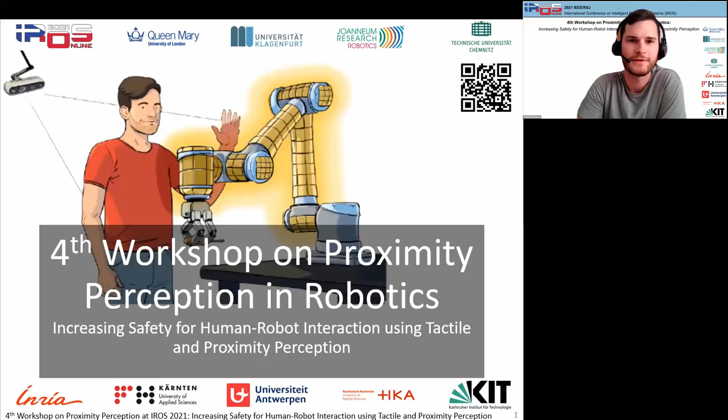Everyone, it's my pleasure to announce the 4th workshop on proximity perception in robotics. This year's topic is on increasing safety for human-robot interaction using tactile and proximity perception. I would give you a brief outline and general information about this year's workshop, how we organized it, and what is the plan of the workshop.

First, I would like to introduce our organization team. I will give you a short introduction to the workshop, and I will also briefly explain how we structure the workshop this year.

The topics of interest: the proximity perception workshop is now in its 4th edition, and our focus was always mainly on proximity sensing and also multimodal sensors, which is getting more and more attractive in this domain, like tactile sensors and shear sensors. We are also interested in robotic skins and the architectures involved in developing these robotic skins.

Our main focus and goal is to bridge the gap between proximity perception and tactile perception, as we believe these two fields are getting more and more important in the future, along with the applications involved. For example, human-robot interaction and human-robot collaboration with AI-based technology. We believe that bridging the gap between these sensing domains will further enhance future robotic systems.

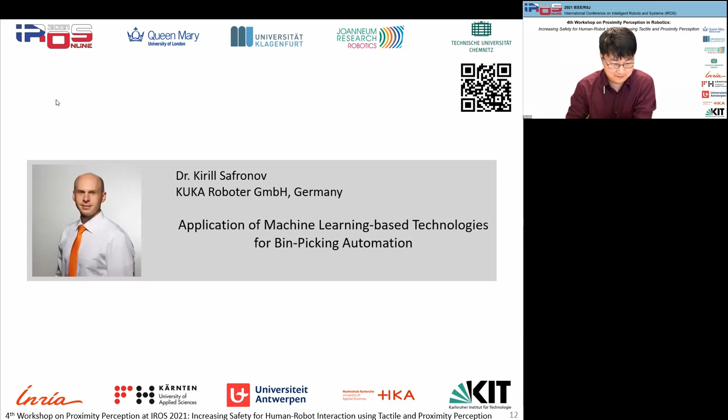So Kirill, can you share your screen? And your audio is turned on. Okay, can you see it? Yes. Yes, hear me? Yes.

Okay, hello and welcome to my talk. Today I would like to present the application of machine learning based technologies for bin picking automation at KUKA.

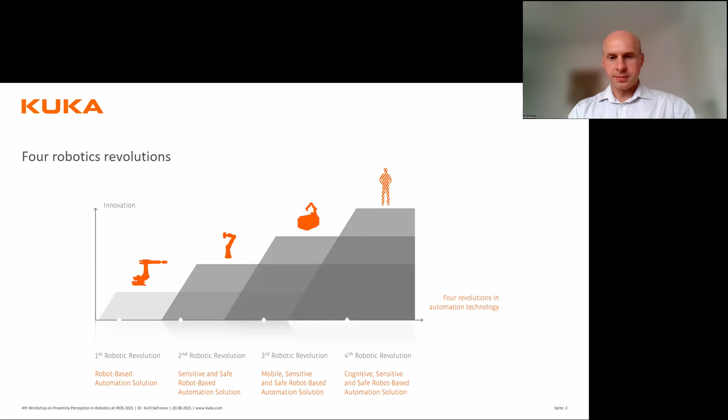Shortly about corporate research at KUKA: we are developing new technologies and innovations for what we call the fourth robotic revolution. We would like to make robots more cognitive, sensitive, and safe. You can see here the overview. At KUKA, we think of 4 robotics revolutions, and we are now at the 4th step.

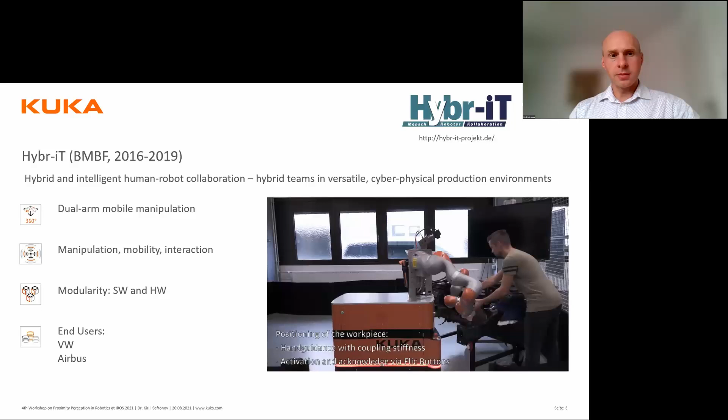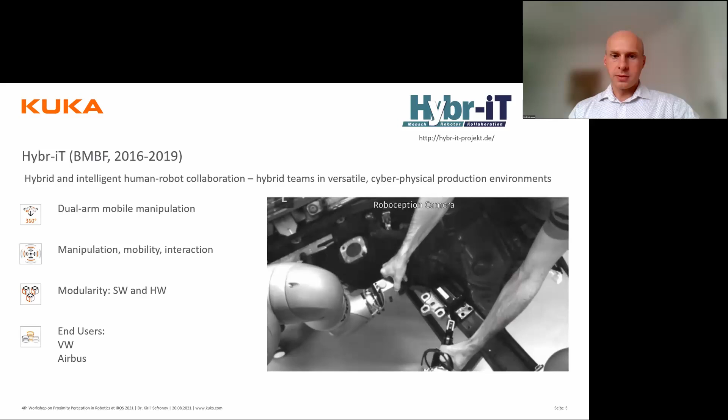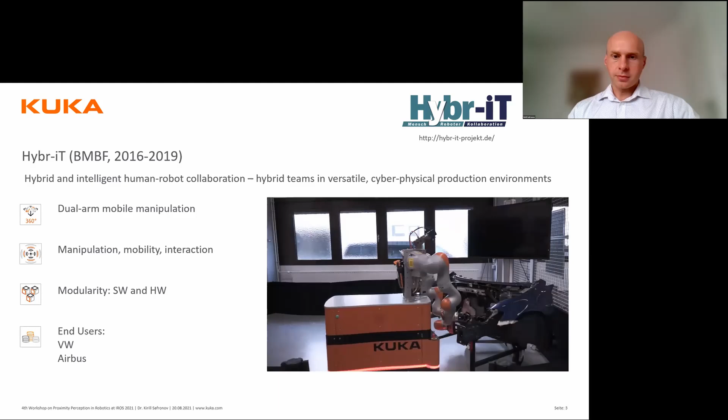For example, I can mention one project from previous years: Hybr-iT, which stands for hybrid and intelligent human-robot collaboration. We developed a dual-arm robot based on a mobile platform to help humans perform tasks which may not be so easy for a human, for example, to hold heavy parts in car production. The robot has a camera, can perceive the environment, can detect objects, can navigate through the environment. So it's our view on how production should look like in the future.

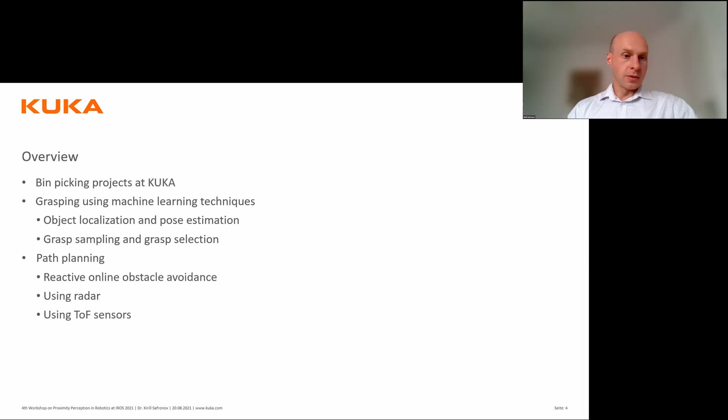But today I will talk about the bin picking projects at KUKA. Which projects do we have? Different techniques, for example grasping using machine learning, from object localization to sampling. Also path planning, how we can implement reactive online obstacle avoidance, also using radar and time-of-flight sensors.

Sorry Kirill, I think we have some audio issues. Can you maybe speak a little bit closer to the microphone? I think your noise suppression algorithm always kicks in and reduces your volume. Okay, now it's better? Yeah, now it's better, yes.

We use a 3 or 4 finger gripper, then the ItemPick project, when we are dealing with unknown objects we pick. It should not be so precise, so we use a suction gripper. And we have a lot of classic bin picking projects when we have the CAD model of the objects known, and we try to precisely grasp these objects using a 2-finger parallel gripper.

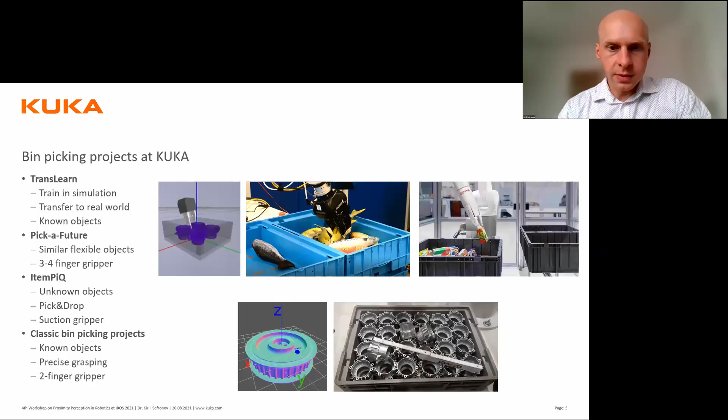So I would like to introduce the Pick-a-Future project, which sensors we used to detect these deformable similar objects. We have 2 systems: the mobile system, which consists of 2 cameras, the Ensenso stereo camera, then Asus Xtion camera, a 3D sensor using structured light; and a static camera system, which consists of different cameras like Zivid 3D or Photoneo, which are very precise. And we're using a robotic gripper.

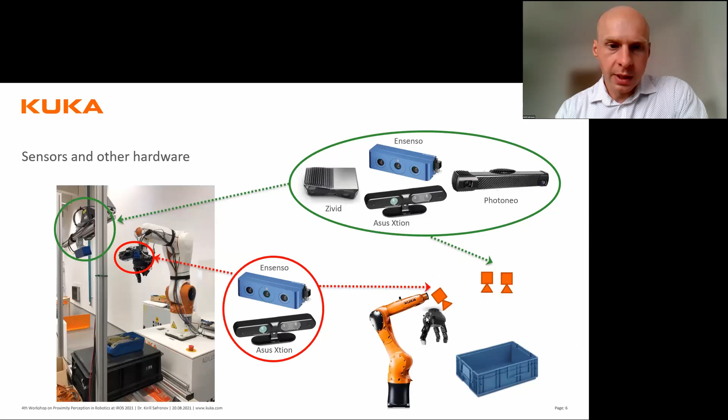The pipeline looks like this: we have 4 steps. First, we have to detect the pose of the object using a machine learning based technique or CAD matching, the classic technique. If the objects are recognized, we try to calculate and detect all possible grasps without considering collisions with the object, so we have a list of grasps. Then we have to select which grasps are possible for our system, here we use a deep learning, machine learning based system. The last step is path planning, where we try to calculate and plan the trajectory which has no collision and which can reach the pose.

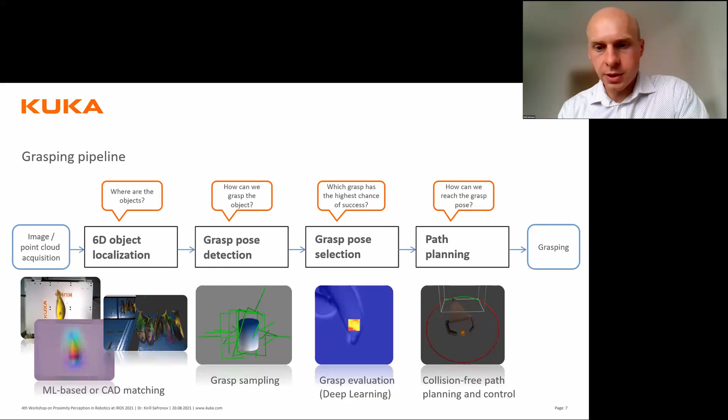So first about object localization. In this project we are cooperating with partners who provided us a method based on CAD model matching, so we're trying to detect these fishes. The fishes are dummy fishes, it was not so easy to use real fishes.

It works quite well, maybe a little bit shifted, but it's okay for the fishes to grasp them. If we want to detect the fishes more precisely, we had to generate 3D models with a mobile scanner, but it took too much time for this. So we decided to use the machine learning based technique to detect the objects.

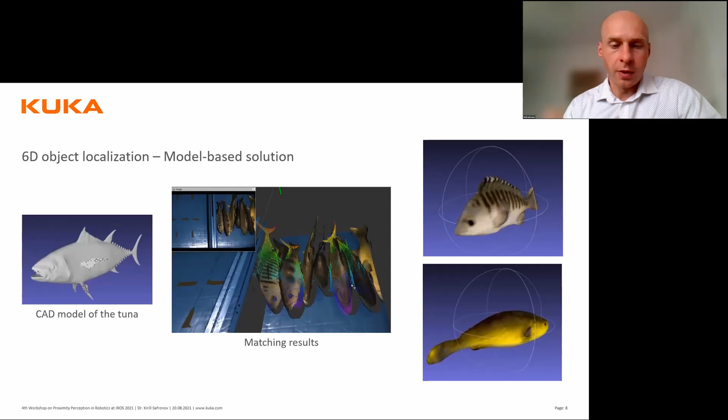Also, the fishes are not similar, they're deformable, they have different sizes, different colors and so on. So we decided to use the dense features using neural network.

We trained our system to calculate the descriptor map, the dense feature map from 2D color and depth image. You can see here 2 examples, 2 fishes which are different, same fish, different color, different size, and 2 descriptor images. You can see that if we define 3 features, for example, we defined eye, center, and back fin,

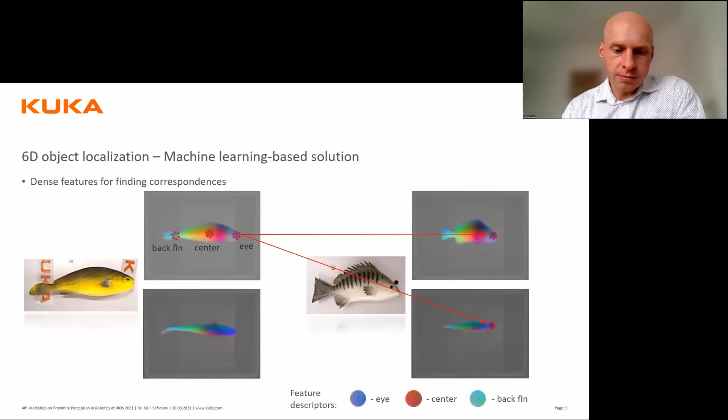we can find the same descriptors on the other images. The features are not the same, but the descriptors correspond quite well. Also, if the fish is deformable, it's not a problem. If the lighting conditions are not the same, it's also not a problem.

Some results. We tried to detect the single fishes. We tried to detect the pile of objects, and we found out that if we detect single objects, it works quite well. So we can find the features.

For example, here you can see 3 heat maps: heat map of an eye, the probability that the feature is there, heat map of the center, and the back fin. So actually it works quite well.

Sometimes we have mismatch. If we have a pile of fishes, if the fishes are close to each other, some features are mismatched or misaligned.

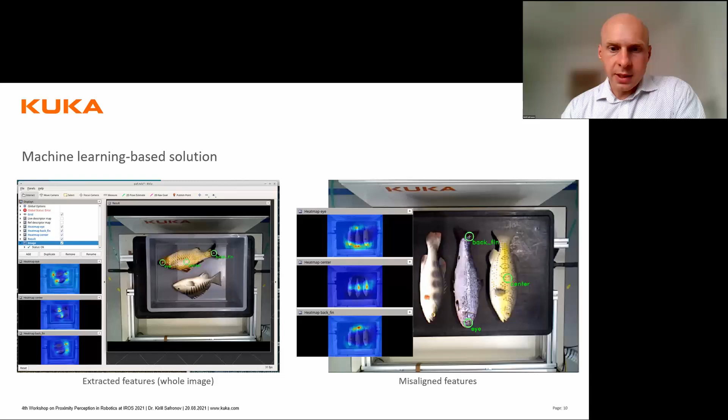We decided to use the segmentation first. So we segment the fishes or objects, the topmost object first, and then we detect the features just in this crop from the image. There's a video of our results.

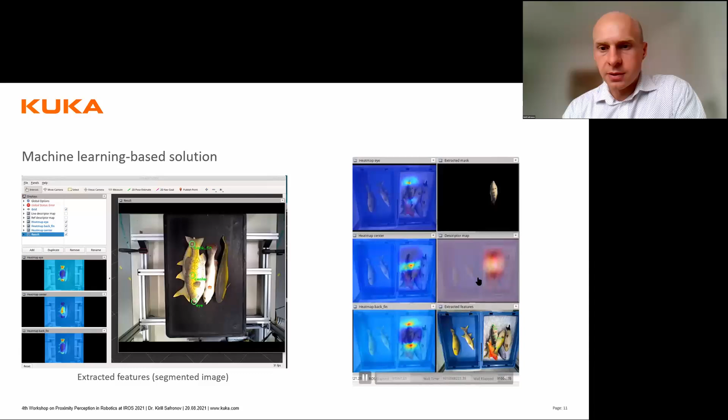You can see the segmentation, the segmented fish. You can see the features which were detected just on this fish, and this descriptor map, which actually looks not so nice if it's not segmented, but if it's segmented, we can detect the fishes and extract the fishes from the bin.

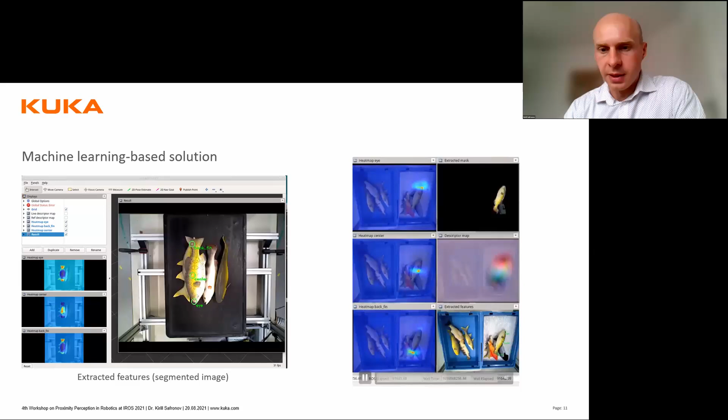Also, we got some examples of real fishes, pictures of real fishes from our partners, and we used the trained system, and we tried to recognize the features, and it worked quite well. The pictures are quite different from the ones we used for training, and we can still find the same features.

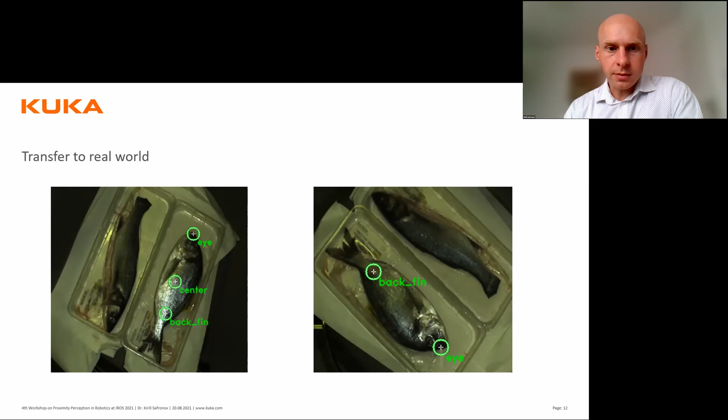So now we have the poses of the objects, and we're trying to calculate the grasps using simulation. Another point was to simulate also the grasp.

So how good is the grasp? For example, if the grasp is not so good and the object could be lost, we remove this grasp. We can do this in the physically based simulation.

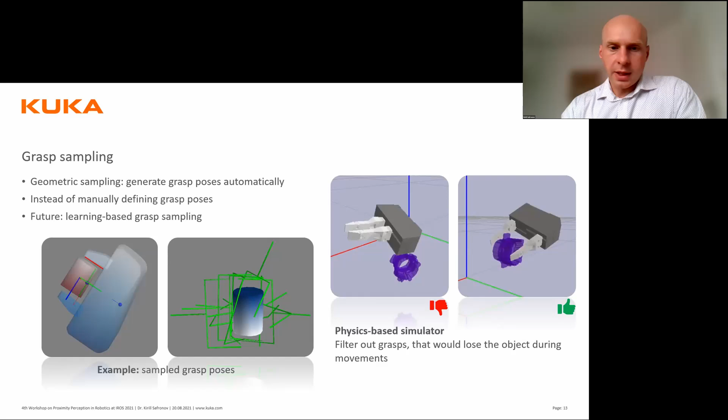We can calculate all possible grasps. We can remove the grasps which are not so good, but then we have to select the grasps which are more stable. For example, we can use the angles of the gripper, the openings within the fingers, so different data which we can gather without machine learning.

Then we can train our system also in simulation and transfer this system to reality. So we found out that it can bring very much in performance, and the grasps became more stable.

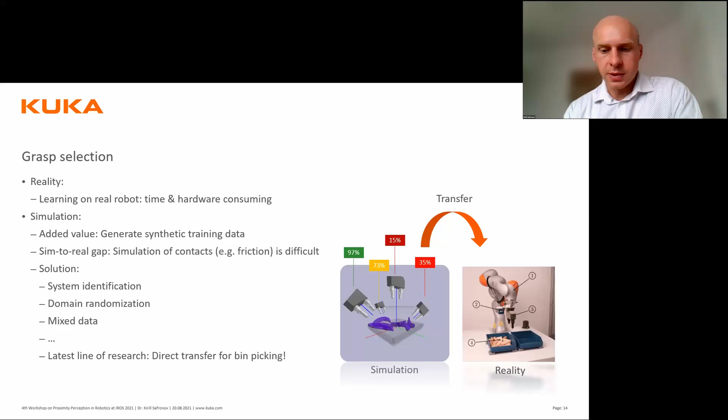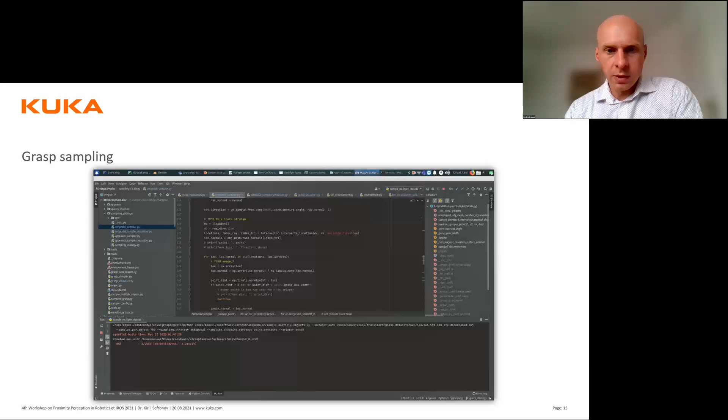A small short video about our results. Grasp calculation: so we have a CAD model, we can also use a point cloud from the fish, for example, and we can calculate all possible grasps.

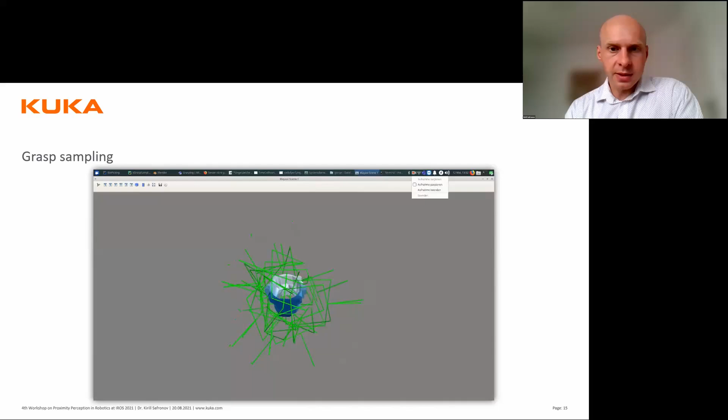Then we filter out these grasps, as I explained already in the previous step. We can prune all these grasps. We can do physics simulation, and if the object is lost, we remove these grasps.

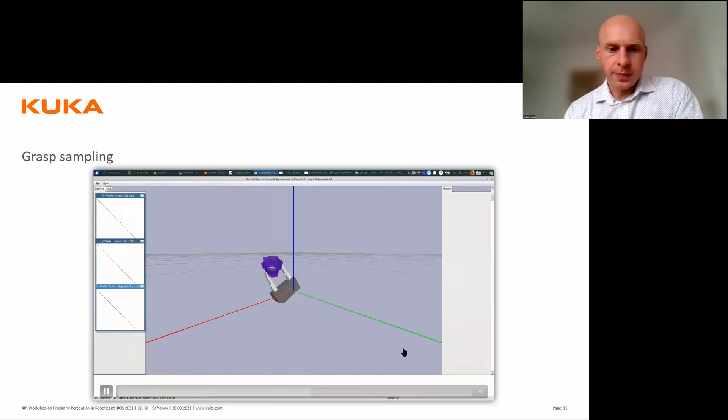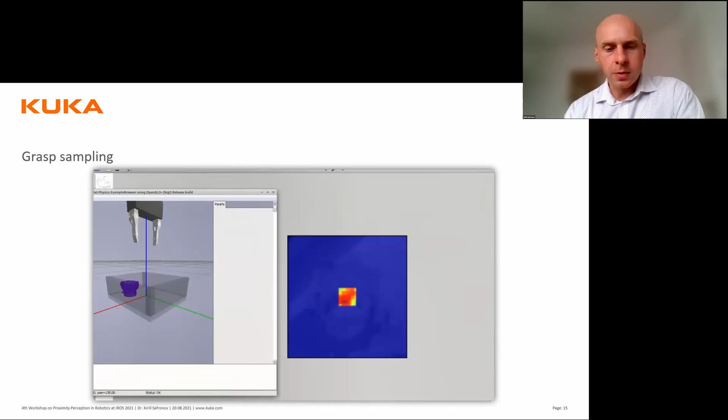After this, we can take a bin, simulate the pile of objects, and try to detect these objects in the simulation. When it works quite well, if the system is ready, we can transfer to the real system and grasp the real objects.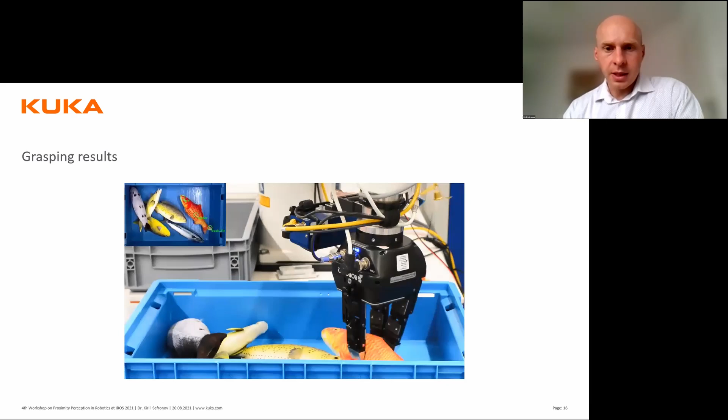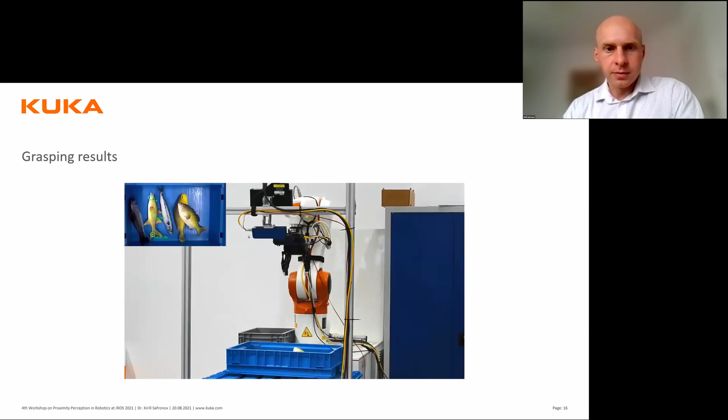This is a video of our prototype system using machine learning based detection and robotic gripper. You can see that we can grasp fishes. We can detect the fishes, we can grasp the fishes, we can have collision-free movement of the robot.

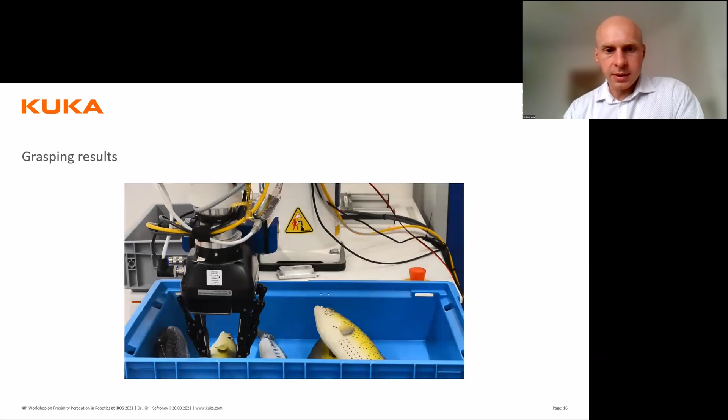For sure, the gripper is not so perfect for such an object. For example, some flexible gripper would be better. Also, another problem is after grasping, if the object is shifted, so we have to localize the object in the gripper to place it more precisely. We did it using visual sensors, but we were thinking about using tactile sensors to detect the position of the fish in the gripper.

It's just an ongoing task, so it's in progress. The project is still active.

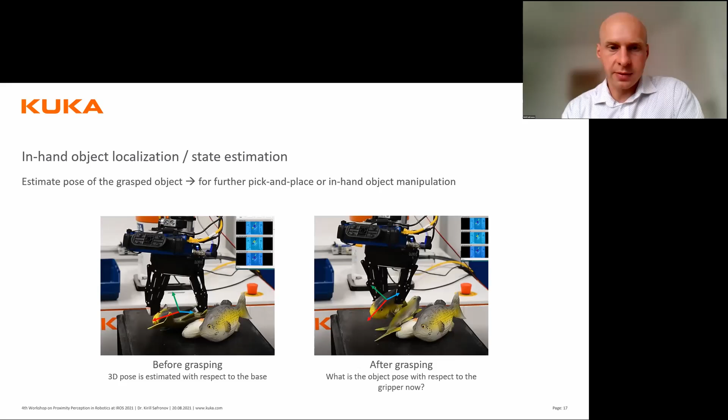So the next step is collision-free path planning. We use a normal algorithm. We use a CAD model of the environment and of the objects in the gripper to detect collisions and calculate the collision-free path. Also, we can use the point cloud with dynamic data to calculate the collision-free path.

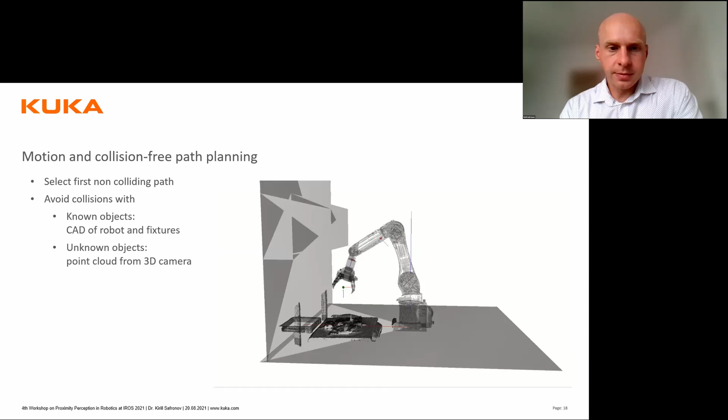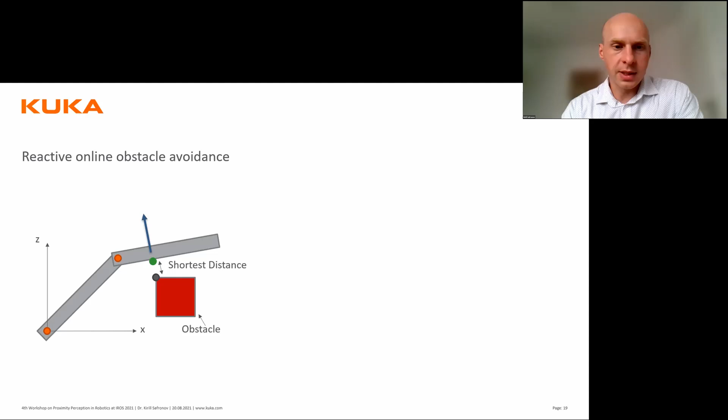Therefore, we developed a system for calculating the shortest distance to obstacles. If the obstacle is static, like a table or robot fixture, it's not a problem. If we know the angles and so on, we can detect the shortest distance to the obstacle. For example, we take the link of the robot, and from each link we calculate the shortest distance. If the distance is smaller than some threshold, we consider this position of the robot as in collision.

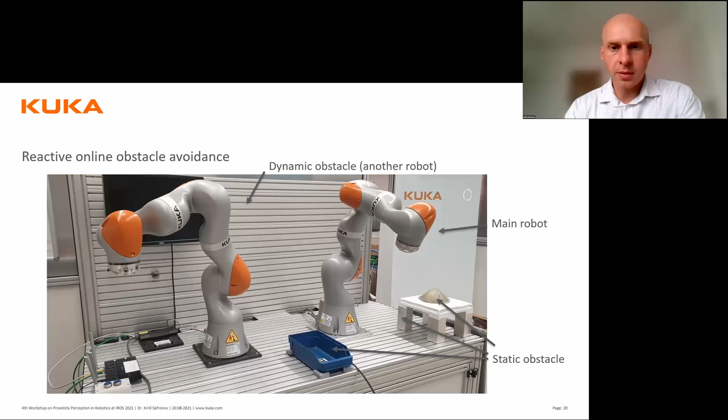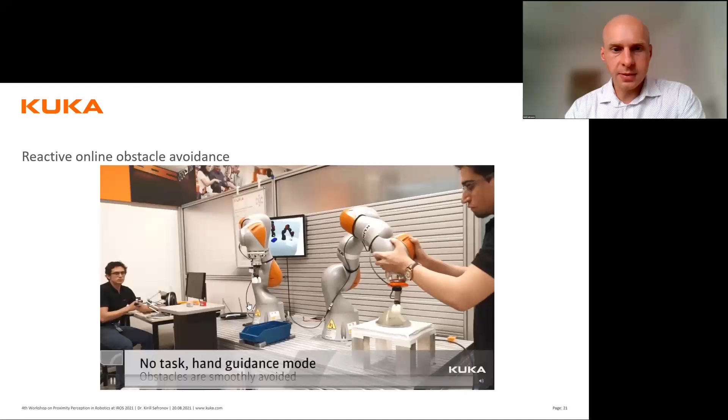We did it using just calculation, but not offline, online calculation. We use the current position of both robots and we can calculate the distance. It looks like this: the one robot on the right performs some tasks, the left robot has another task which has more priority. So if the right robot moves towards the second one, it can collide with it.

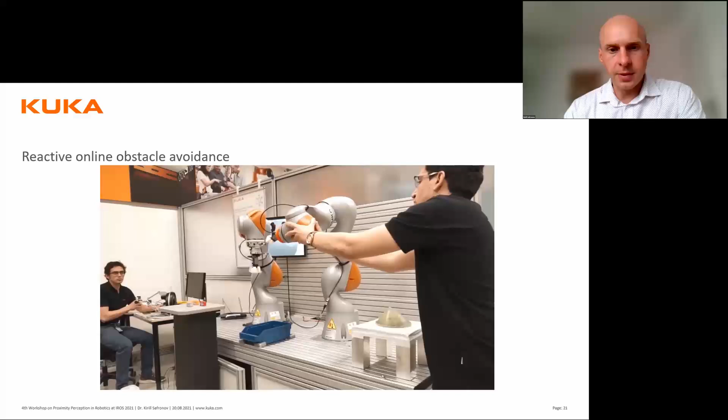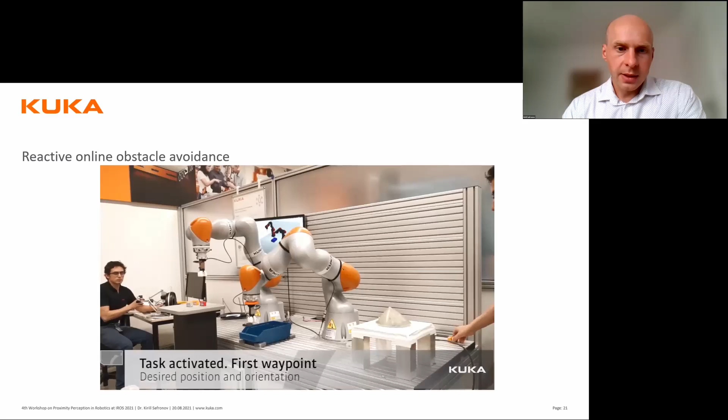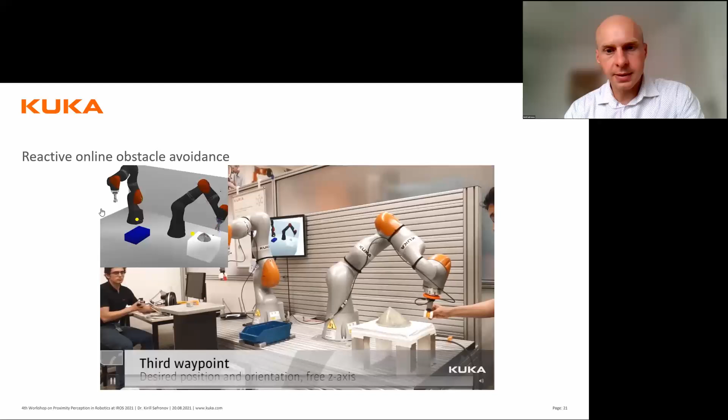If we switch the tasks and the task of the right robot gets more priority, the second robot moves back. So there's a simulation of our calculations, and actually it would be nice to calculate all this movement without using axis positions, but instead using sensor data.

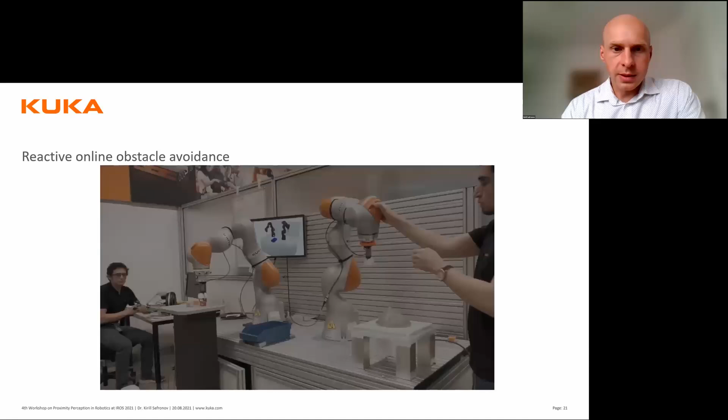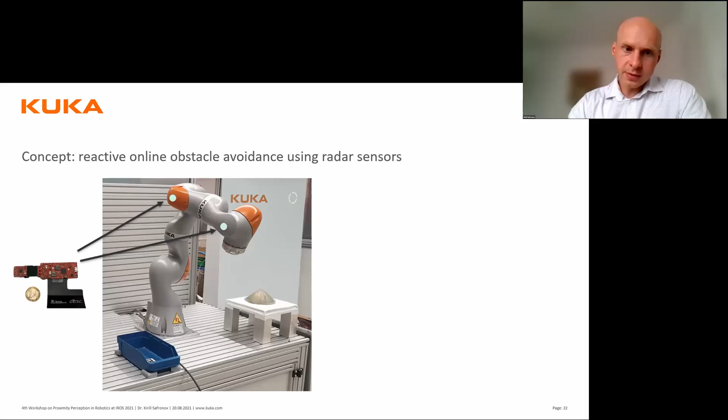So our idea is to mount radar sensors on the links of the robot—small radar sensors which can calculate the distance to the nearest object, and we can use these distances. It should look like this; we did it in simulation. The radar sensor gives us just a distance to the next point of the dynamic object, and we don't need information about the current position of the robots, so we can save time and perform the task more quickly.

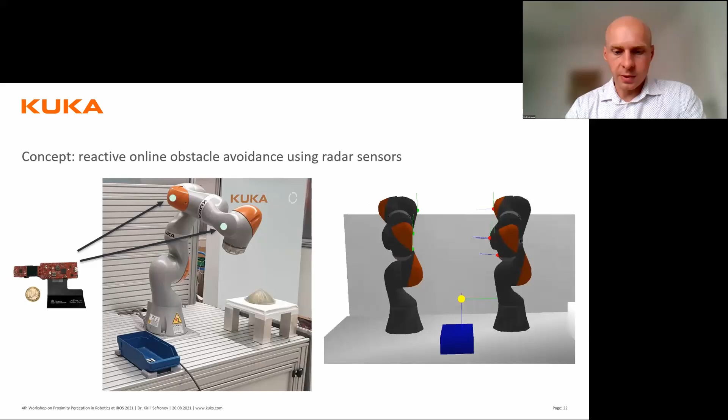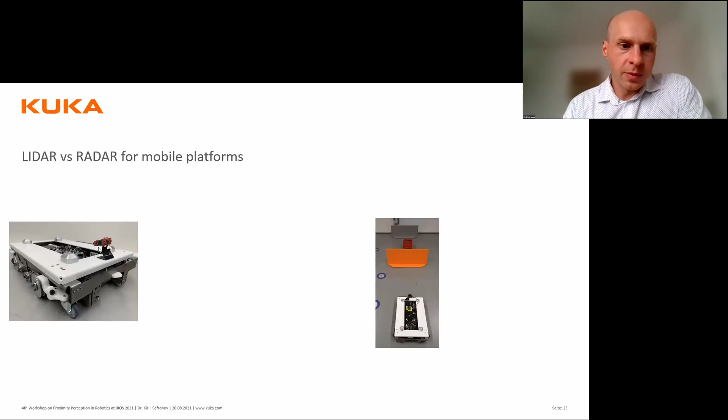About the radar sensors, we have another project where we developed a mobile system and compared LiDAR with radar sensors. For example, we mounted a radar sensor on the mobile platform and tried to detect obstacles like a wall, a box, and another wall.

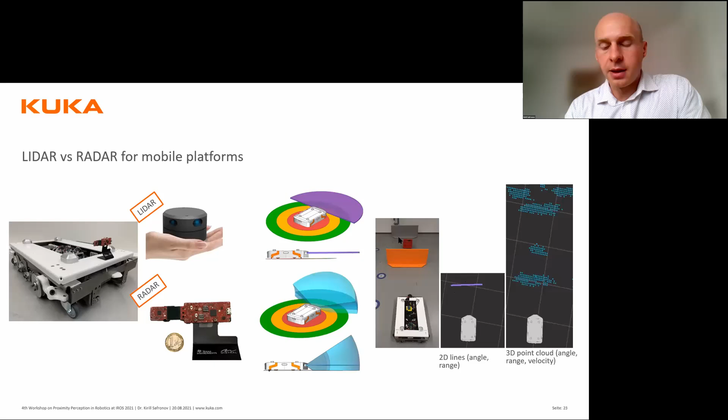We found out that using LiDAR, we can get just a line describing this wall. Using radar, we can get not just the wall in 3D, but also the box behind it and another wall behind the box, and the first wall. So it brings a lot for mobile manipulation.

So we did other tests. For example, we tried to classify objects and compare with camera recognition. With a camera, it's very easy—if you have a 2D image or point cloud, we can detect structures in the image or point cloud. We can do the same in a radar image. When using just a LiDAR sensor, we get just 2D points, and we can't easily distinguish between two 2D point clouds. If we use the camera or the radar, we get a 3D point cloud, take structures which are similar to each other, and classify objects, like a human or a cart.

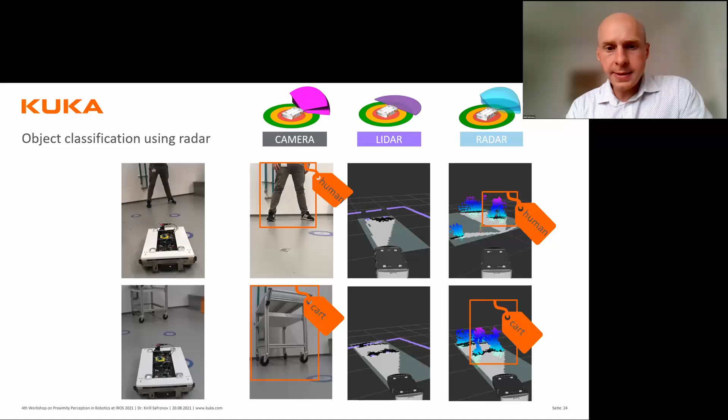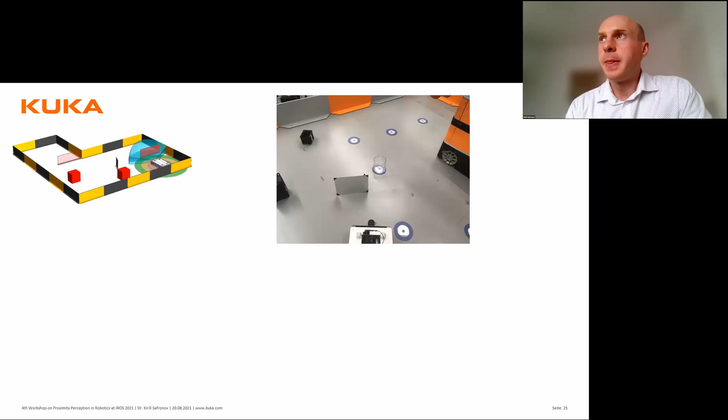That was one test, and another: we tried to use radar to detect obstacles which are not so easy to detect using the camera, for example a mirror or a transparent object like a glass.

On this picture, you can see the map generated by LiDAR. On the right side, you can see the map generated by the radar sensor. If we look at this wall on the LiDAR map, it's just a line. On the right side, we have a point cloud—not just the wall, but also parts of the robot behind the wall. So we can do classification and detect the wall, detect the robot.

So the problem here, the box is standing behind the mirror, and LiDAR cannot detect this box. So the box is invisible for the LiDAR sensor. For the radar, it's not a problem. We can see through the mirror, we can see this box, we can put this box into the map and consider it like an obstacle.

Also, you can see that the mirror is present on the radar map, but it doesn't present on the LiDAR map, and it's also negative. We have some points which are not there. So it's a problem of mirroring.

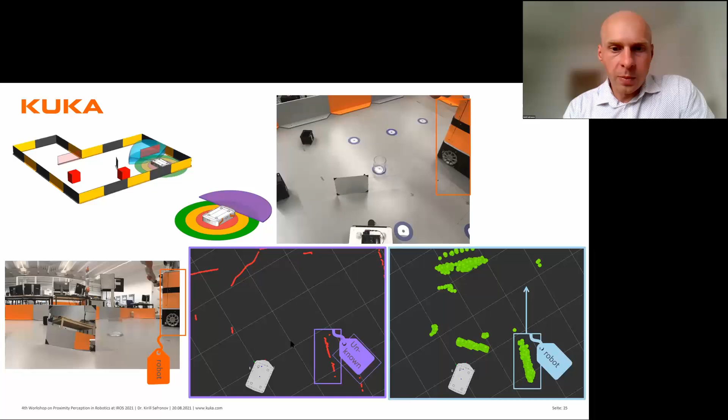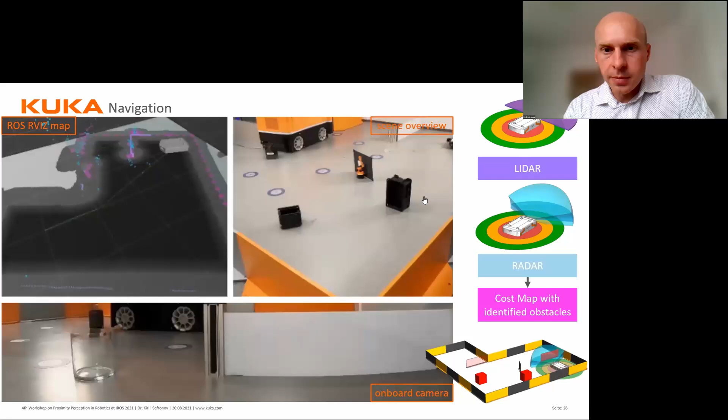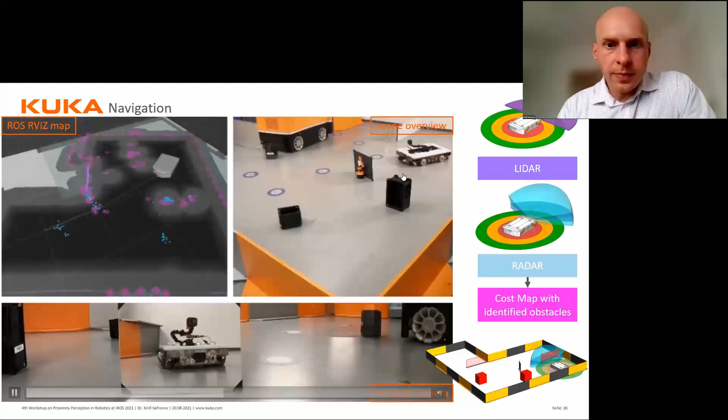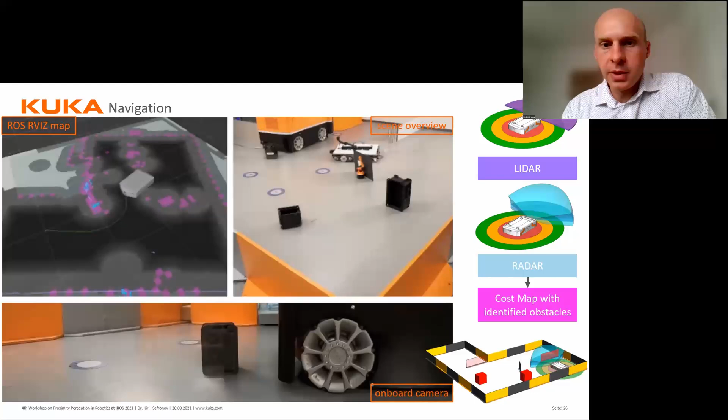Also, as I said, we can get more points, more data, for example robots point cloud, and so we try to implement this idea for navigation. So we put two objects, the mirror and the glass, the transparent object, and try to navigate just with the radar sensor, using just a radar sensor. You can see that the robot can move, can detect these two objects, and can move through these objects without collisions. So the same idea we can use also for our bin picking system to detect other objects, putting the radar on the links of the robot, as I told before. So it's a very promising technique, and we'll try to do this during this.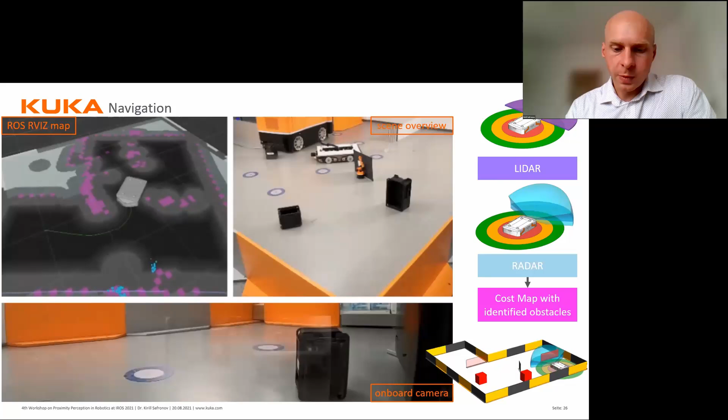What we did shortly about time-of-flight sensor for safety. Also, we have some project in safety. The advantage of the sensor, it's not just that it's very fast and has low noise, but also that we cannot identify people. It's very good for data privacy and so on.

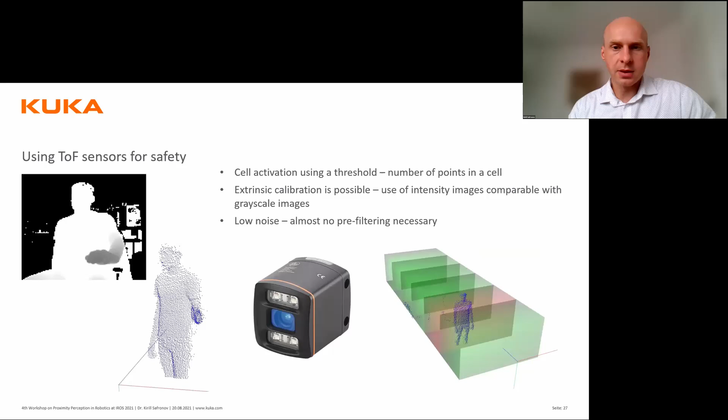So we have one new project, it's called RoboMove 3D, where we're trying to use different sensors for safety and to compare the sensors, for example time of flight or radar.

And in conclusion, I could say that the topic of this workshop is proximity sensors, so how we can use proximity sensors in the industry. As we find out, tactile sensors can be very useful for in-hand object localization, to localize the object when it's present.

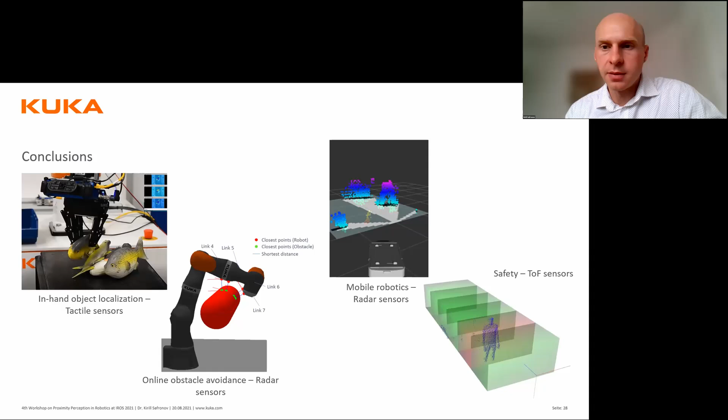We are also trying to implement a system using radar sensors for online obstacle avoidance for multi-robot systems. For mobile robotics, the radar sensors can be very, very useful, also for planning, collision-free path planning in the map, and detecting difficult objects, and for safety. So thank you, and I would also like to thank my colleagues who worked on these projects.

Thank you very much, Kirill. That was really a lot of extremely nice examples. I would like to, yeah, exactly. So if there are any questions from the audience, please just raise your hand, as some people already did. So I would go ahead.

Mr. Pilz, you already have a question? No, not a question, just the wrong click, but congratulations to the work shown in this research.

Yeah, so I would go ahead. Kaspar, you also have a question? I think Matteo was before me. Okay, yeah, I don't see the order, so go ahead, Matteo.

Really nice work. I was interested in knowing, so you showed that from the radar sensor you build this kind of point cloud, and I was wondering if going from the raw data from the radar sensor to the point cloud is something that you developed in-house, or if it's something that is given by the producer of the radar sensor.

Yes, so we're using point cloud directly from the sensor, it's already provided by the manufacturer of the sensor. Okay, thank you very much.

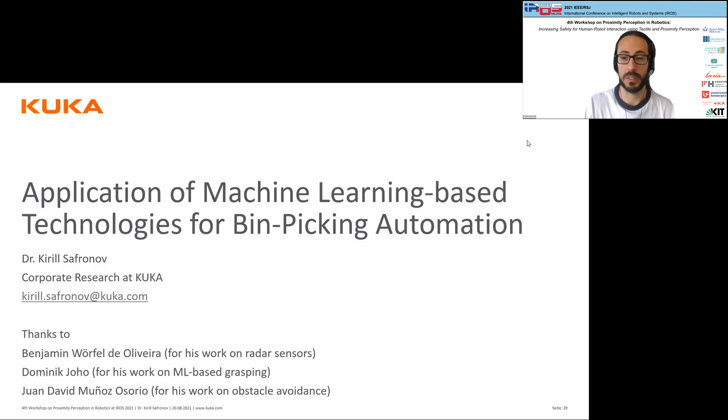All right, thank you very much. As everybody said, it was really nice to see a lot of examples with different robots, different applications and different sensors. It was really good and complete. So thanks again. I will hand it over now to Kaspar for the introduction to our next presenter.

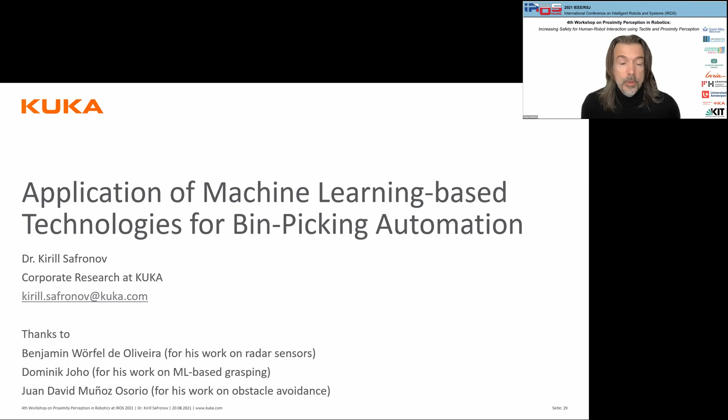Yeah, thank you, Barnaba. It gives me great pleasure to introduce the next speaker, Thomas Pilz. He comes from the company Pilz, a family business, and with his sister he is in the management of that company, in the third generation I have read. Just a quick overview: Pilz started in 1948 focusing on glass blowing, a glass blowing business. But what I really find exciting is how quickly the company evolved from that initial business and went with the times, establishing itself very quickly as a leading company in safety engineering and automation.

And I had myself the pleasure to work with Pilz, in the framework of an EU project. That really shows me how interested the company is in further developing and taking on board the newest trends and developments, and really has great interest in engineering, and obviously uses that to contribute new solutions for advanced automation in industry.

So it's also very strong in contributing to Industry 4.0. And we had this short chat earlier, Thomas, and I hear there's also interest in AI and machine learning. I find that particularly interesting because many companies are reluctant to go in this direction, especially when safety is involved. So I'm looking forward to hearing from you, Thomas, about the newest trends at Pilz and what the future holds. Pleasure to introduce you, and over to you. The floor is yours, Thomas.

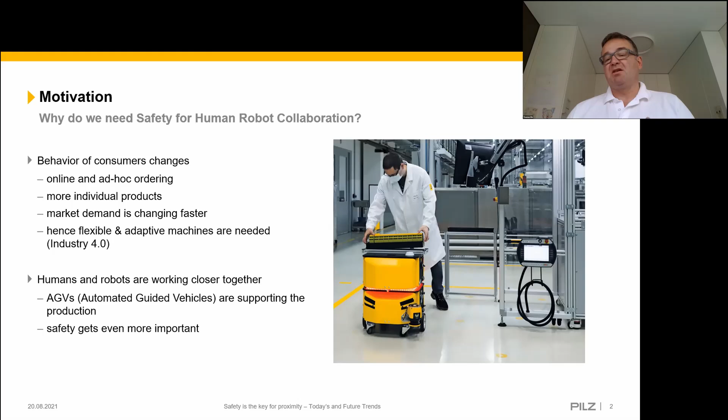I really loved the example of the three sensing technologies - radar, TOF, and stereo camera - and how you combine them to achieve your objective. I believe, saying that in advance, this is the trend in the industry: it's not to create a safety sensor per se, it is to create an application where you can work.

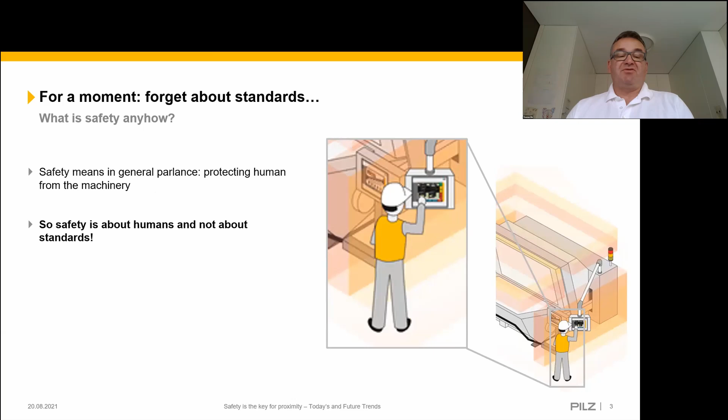And that's just a little provocative statement again: safety is about humans, not about the standards. That's why I'm focusing on the industrial standard ISO 10218-2 that describes the application. There's a 10218-1 that describes the safety functions a robot arm has to have, that a robot controller has to have. But really, in the application part, 10218-2, we're starting to get a safe application - just like a safe fish-picking robot, a safe AGV transporting parts from A to B and loading and unloading with the onboard arm.

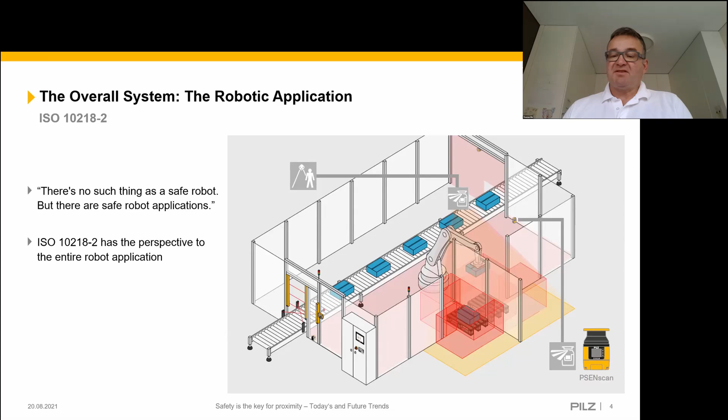Why do I say that? Because I just hate the word cobot. I hate the word safe robot, because it gives a wrong perception. There is a lot of engineering needed, a lot of sensing needed to bring a, now marketing term, cobot to the market. There is always sensing involved, even in the standard.

When I have speed and separation monitoring - that's our topic of today - this is where safety has been a story of failure. Then you have power and force limiting - this is where safety has been a story of success. You've seen the KUKA arm, it's equipped with safe sensors inside the arm for power and force limiting. This, however, makes the application really, really slow.

If we look at speed and separation monitoring, one of the reasons for failure in the field is the distances you need to adhere to and the tests you need to go through as a manufacturer of a safety sensor. When we developed the safety eye, which is the first safety camera on a 3D stereo algorithm base, we had 20 years of work improving not the safety function, but the reliability of the system.

Because in safety, the paradigm is when you're not sure, you shut off. When you shut off, you kill production. Now, if you look at the four revolutions that Kirill showed in his first slide, we were ahead of time because we didn't have the robot functionality that would allow for a collaborative, slower mode when a worker is present. We always had to shut down.

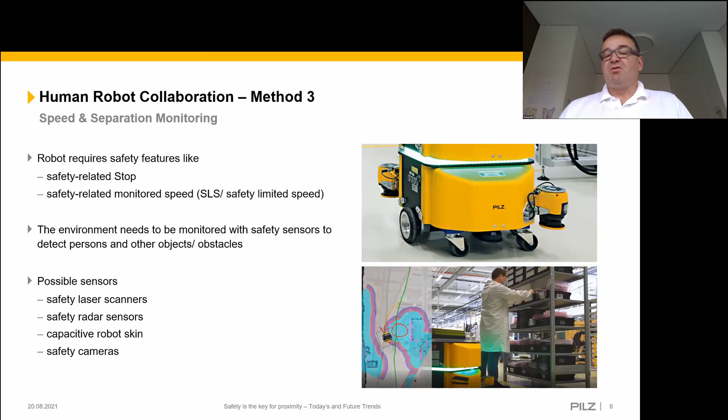But there are so many small warehouses out there that a human with human information does the picking and bringing to a counter. And if I had a robot that can drive next to some of the human people using barcodes or whatever is needed for the human to find the part, we would have a much less cost-intensive solution where people would dare to use it because they can interact via gesture, via voice, and they could be protected by proximity sensing solutions that make you feel comfortable next to a machine, because that to me is power and force limiting.

Why are large robots not really accepted for power and force limiting? Because humans usually on a psychological scale feel uncomfortable with a large machine that can move really, really, really fast. So that's why method four only gets you half the way.

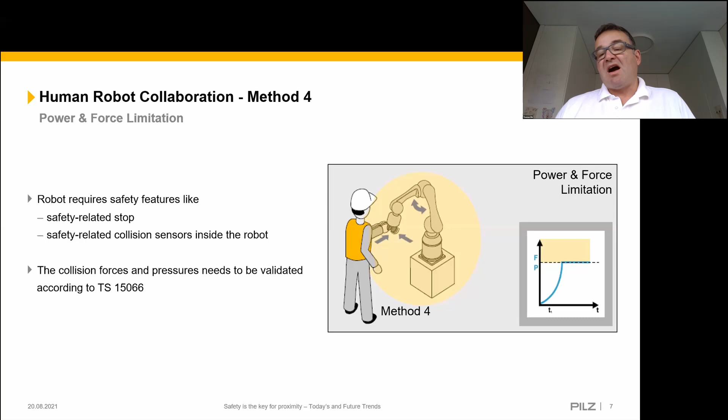What is the future? In my opinion, we at Pilz focus at the moment on radar technology. We focus on sensor fusion, and we hope that through the failures in safety we've made so far, in the future we can be participating when the success with safety does start.

Because research only advances with failure. You know it works in theory, then it fails commercially in industry. So you change the parameters and move on. This is basically what Pilz is all about: we try things out, we hope to fail fast, and then with this get the information so we can move on.

A very interesting question for companies like Pilz is, how can we collaborate with machine builders like KUKA when there is the availability of embedded sensor technology? What is the shape, what is the need for a robot manufacturer in the future for sensors? Is it what you see in this picture, something with a housing, or is it a 'Halbfabrikat' - semi-finished product - or is it a different concept entirely?

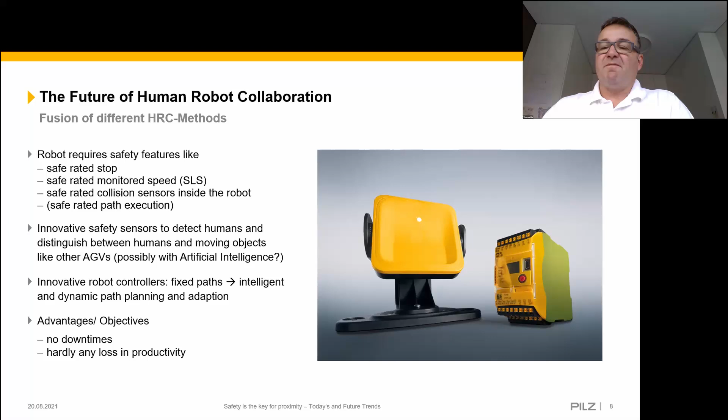Yes, thank you. Now, more than a question, I have an occasion for some knowledge sharing, because it's quite a nice coincidence that my latest research is exactly on these topics. So in this slide here, you have detect humans and distinguish between humans and moving objects like another AGV, with speed and separation monitoring out of TS 15066.

It's interesting to see that this is actually something that is being done. So I worked on an algorithm, and now at IROS I will present a paper showing how to distinguish, with radar sensors, between humans - we had a mobile manipulator robot in-house - and then how to assess this with speed and separation monitoring.

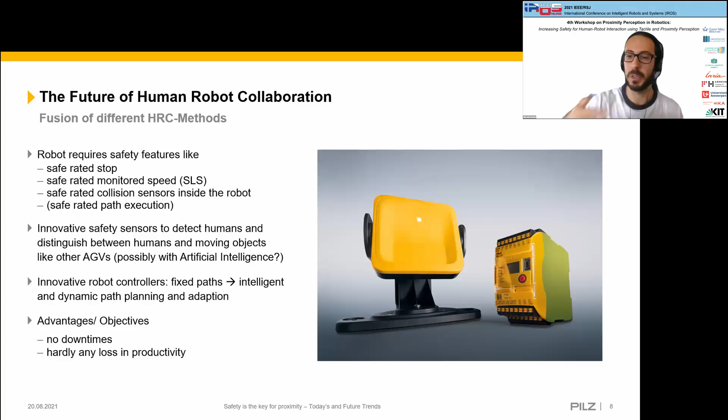So before, in one of your previous slides, you showed the standard configuration where you have these three detection zones, and according to the distance, you either go at full speed with the robot, half speed, or you just stop, right? The idea we had was: why does this need to be in steps? You could control continuously the speed of the robot, basing it on the distance, because you have this formula where you consider the distance of the human and the velocity of the human - but the standard formula in the ISO says you always look for the worst case, right?

With the radar, the nice thing is you directly measure velocity, so you can include the actual velocity information of the human directly into the formula. The whole goal was to increase productivity.

We had some comparison, it's exactly what you showed, it's really a nice coincidence - increasing productivity while still maintaining the level required by speed and separation monitoring.

But changing the robot speed continuously according to how the human was moving, how fast, in which direction, and whether the target was a human or another AGV.

This is also a very nice thing you highlighted - if you just have a robot moving toward another robot, this is way less safety critical, because with safety we deal with humans, not machines. That was extremely nice to see.

One question - let's say you have your system that does this, and I have my research that does this. When we want to put it into production and get safety approval, is there a way we should say this is safer than that, or either it is safe or it is not? What's the current regulation on this?

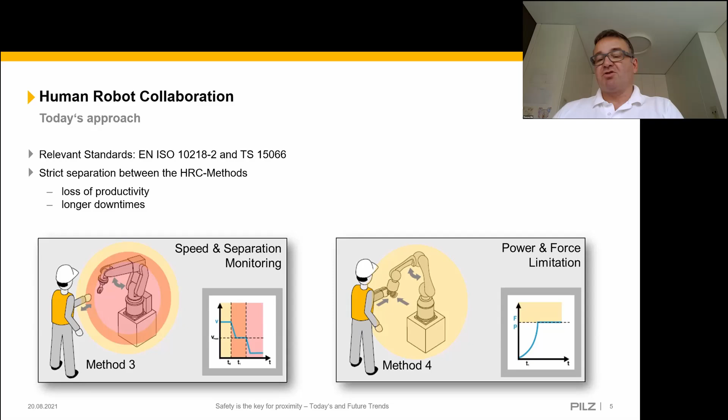We have the controller, we have the application in mind, and with those sensor algorithms in this particular application, we can have a safe solution.

What is the economical problem there? You would have to reassess each application at a time. And that again is the question from Björn - where the hell do I find all those experts that are going to give me the application-specific green light to use it?

So these really are the stumbling stones, or I would say the delay - this is the delay part when you talk to safety about it. We would be much further with human-robot collaboration if there wasn't the worst case scenario requirement in industry.

What is the benefit? The benefit is that we have very, very few fatalities in robotics, very, very few severe injuries, and that is the human part in it. Nobody wants to lose somebody they love and that they know. When you don't know the people, statistics give you different answers.

Yes, thank you. I hope it's okay if I add one more question.